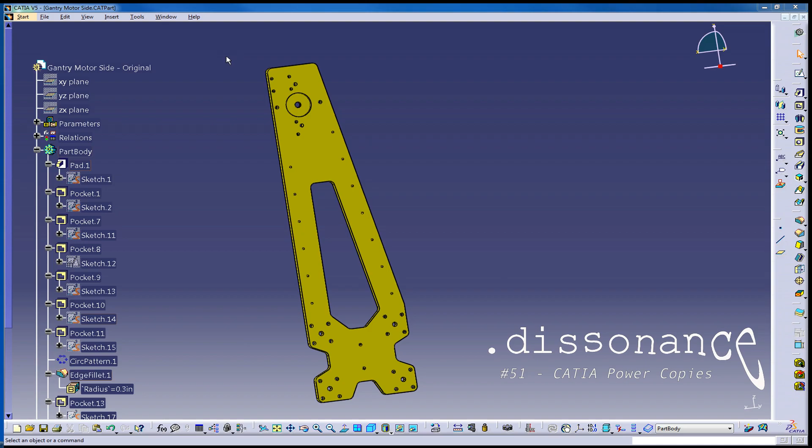Here is one of the vertical gantry supports for the CNCs that I build. What I'm after today is in this area here, this is the mounting section, the mounting holes for the NEMA 24 stepper motors that goes on the side.

So what you're looking at is there's the hole for the motor shaft, of course, and this is a recess. The NEMA 24s have a little bit that sticks out, so we recess that in. And then the 4 mount holes, which are here, here, here, and over here.

If you follow that in the tree, we have, let's see, pocket 9, pocket 8. The original pocket is pocket 7, and then down here there's a circular pattern that goes around that creates the rest of the holes. All right, so here's the problem.

This is a common feature. The NEMA 24 hole pattern is a common feature in things that I might build. If I'm going to stick a motor onto something, I'm going to need to have this same thing. I don't need all the rest of these holes. I don't need these lines. I don't need all the rest of this stuff down here, but this is common.

So it would be nice if we could save this. If I could make a stamp out of that feature and I could just stamp it into any product that I make where I need to mount a motor to, that would be great. To take it a step further, if I could take that and save it maybe in a catalog, that would be pretty cool too, but that's another topic.

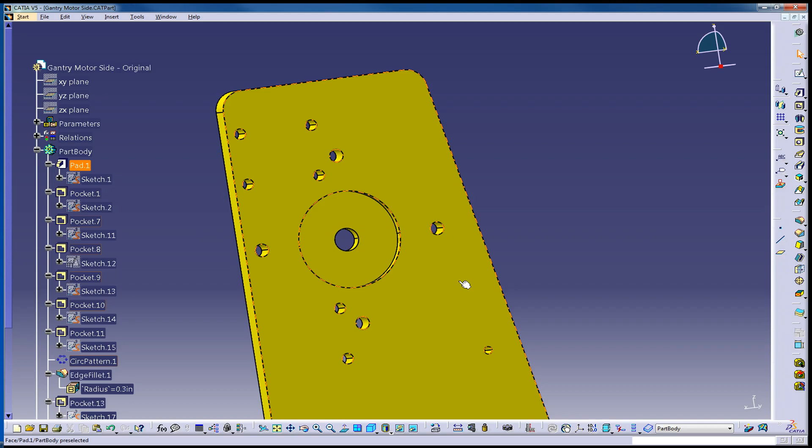So today's topic is about power copies and how we can use them to do exactly this.

So let's say we have a new piece right here that we're going to build up for some other device. Maybe this is a short, squatty little laminate cutter or something, but I'm going to need to have a NEMA 24 motor hole pattern placed right in here. So how am I going to go about doing this efficiently?

I could flip over to the other one. I could copy out piece by piece, paste it in here. I'm going to have some problems. I'm going to have to, with sketches, redefine the sketch plane that it's on. The orientation might be turned a little bit, so it's problematic.

So that's where power copies excel. So to get started first, we have to go make a power copy, and that's the critical key first thing, because some people don't understand. You got to go make it first, and then we can take it and we can apply it to all these other things.

You don't just strip it out typically, right? You don't strip it out of the part that you already have. So we're going to go off to the side and we're going to make the hole pattern again, but we're going to make it on a plain device. It's essentially going to be made on a flat pad, and it's going to have all the features we need, but not necessarily look like any kind of thing that you would see this on.

So to get started, I'm going to make the base of the power copy, but this will not be used in the placement of said power copy. In CATIA lingo, we call this instantiation.

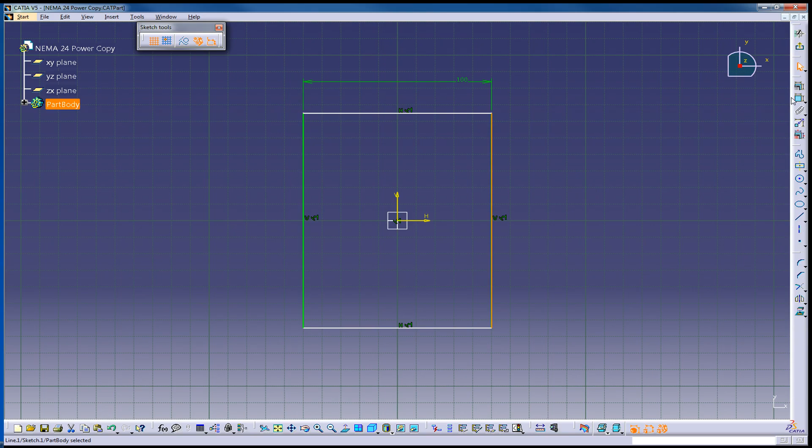So I'm just going to make a new shape here, and this is going to be, I think if we just make it 100 by 100 millimeters, that will be fine. And then this becomes, let's see what I want to do here. Let's make it 10 millimeters. This becomes the base and basis for the power copy itself.

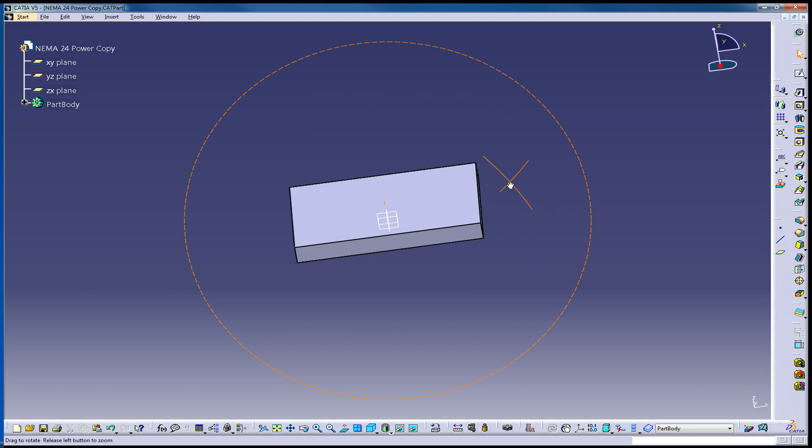So right off the bat, to put the brakes on this whole thing, I want to explain what is probably the most critical piece of this whole power copy deal. And it's a thing that I've talked about a fair amount in some of the other CATIA videos and other just CAD videos in general.

You've got to understand links. The way that one thing links to another thing, the things that you're doing inadvertently that are creating links to the part or other features that may or may not affect what you do in the future. Look back at a video on making bodies, they're talking about that. So for example, if I go here and I go to make a sketch right here, even before I get started, I just picked this face and I'm going into sketch. So now I've said that the support plane for this sketch is the top of this face, the top of this part right here. If I pick a plane, then it will be that plane, and that means something.

Of course, it's a little bit of a deal here, but you've got to keep that in mind because that might be a big deal in a minute.

So then we go into Sketcher here, and we go to make a feature. We want to make the 9mm hole going through here. So you come over like anything else, snap to origin, pull out this circle, and make it 9 millimeters.

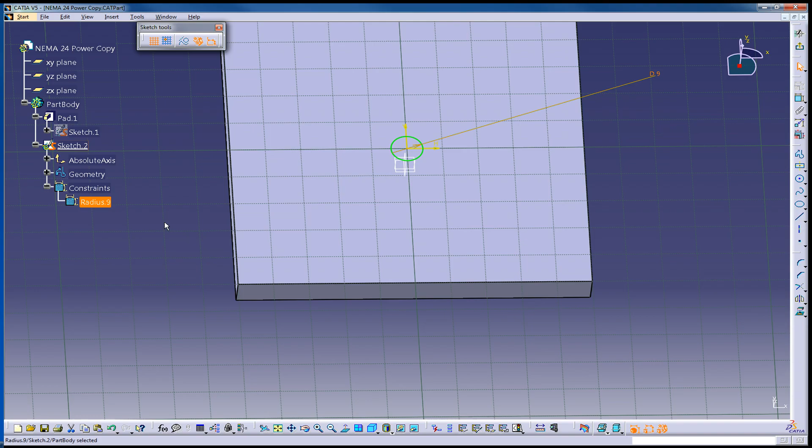The thing you've just done is, the circle part's fine, the diameter's fine, but you've made a link to origin by letting it lock there, and this is one of those hidden constraints. So we have a constraint, and I can't really even look through the tree and find it and get rid of it. That's a biggie right there.

So when you go to place the power copy, here's what's going to happen. It's going to ask you, kind of like mapping, if you've ever mapped a database to a table to a table. It's going to ask you, this sketch is on this face, what face does this mean? Then you'll say, I want it to be this face of this new part.

Then it'll say, okay, that's fine, but what is this origin? What is this center point here? What are you talking about there? And you say, oh yeah, that's this center point here.

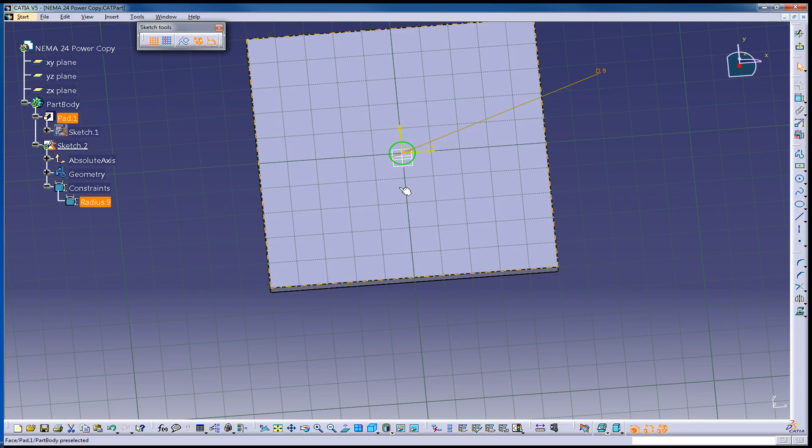Now if you don't get this, if you don't do it correctly, it might want to snap it to the origin of the new part, and that's not probably going to be what you want. So we're going to back this up, get rid of this sketch, and put our own point on this part, locked to that.

Now this is where things are going to begin to get a bit more tricky. So I have to put a point on here. I can do it either in Sketch, or I could make a reference element point. It doesn't really matter exactly, but I need to know where to put it.

So if I go into Sketcher and I put a point, I'm going to put a point here somewhere. Where do I stick this? See this right here? I don't want to stick it to that, because that means it's stuck to horizontal. I don't want to stick it to vertical. I don't want to stick it to origin.

I don't want to put it over here and then start measuring off from there, because now I just said that I'm measuring it off a horizontal. Or maybe I do. So here's what I want.

Let's look back over at the other part here. So I've got them saved over here, the new shape. And let's say I want this pattern here somewhere. So what's a good point that everything is kind of tied to, what would I key off of? One good thing might be just the top edge and the side edge.

It could be origin. It could be the bottom. So here's the bigger point to hold this thing: you need to know where your power copy is coming from, what's going to be the most logical place to place it based upon maybe how the part works, or how people think about how the part works.

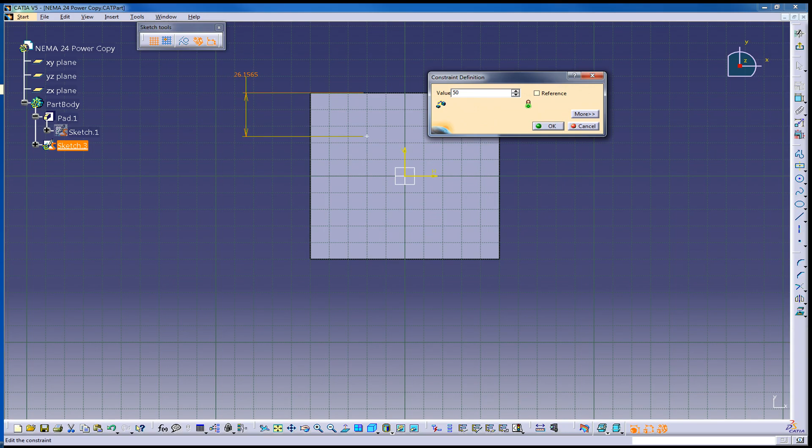Let's just say that the whole diameter of this pattern is around 30 something, so let's say this is 50 down. This will actually just place it in the center, but without locking it to origin.

All right, there's my point. So now we can exit out. We have a point on the surface there. Now we can go about making the hole.

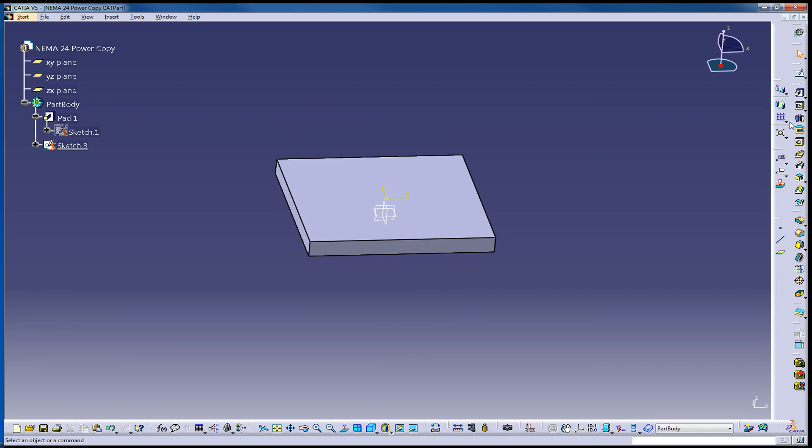You could use the hole tool if you want, but I'm just going to go through and do it as a sketch. So we'll hit the top face here, and now I'm going to draw a circle, but you do not - this is good with a lot of different things - I don't want to snap to origin.

I don't want to snap to the middle, but I can't select my point in there, so you make it off to the side. Super common thing to do. Turn it to the side, grab your center point here, and then constrain it like so.

Now if you still can't tell if you're getting that point or not, go to the sketch in the tree, find your geometry, and make sure that you're selecting the point that you created in the sketch before. So Point.3, there's that right there. And I want to make it be coincident.

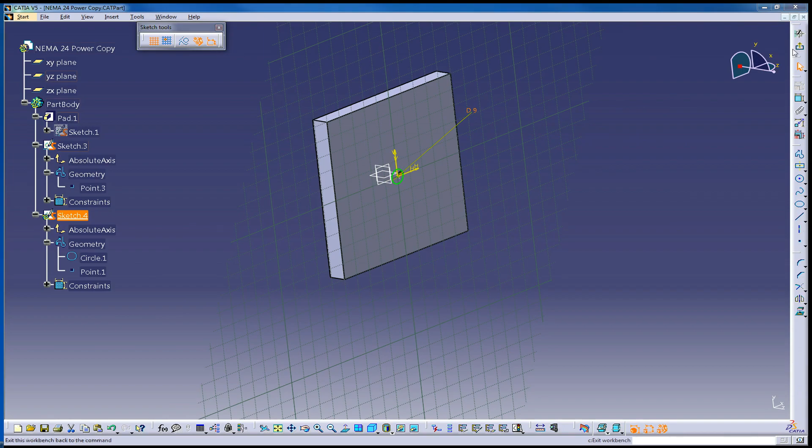So I'll exit out of here, pocket it down through, up to last. Now, right there, we made another link up to last. So this is going to go all the way through. Now this is the shaft of the motor, and yes, we need it to go all the way through.

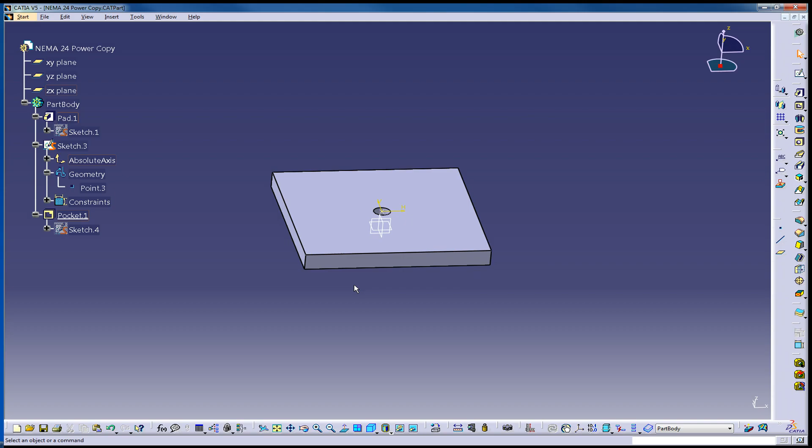What if the gantry side, what if we told it to just go down 10 millimeters, and then the thing that we're placing it on is maybe a half inch piece of aluminum stock? So you would have to change this value. It wouldn't go all the way through. So going up to last in this case is probably going to be your best bet. Keep it in mind though, because it's another link.

So we'll go ahead and we'll make the circle on the face. Come over to the side here. If we want, we can throw on a diameter right now. If we look at the data sheet, it is 38.1 millimeters.

So if we just went ahead, now you think about like how critical is this? Does it need to be really snug to it? No, it just needs to be bigger then. So I'm going to go ahead and say just 39. That should be plenty of tolerance for it to fit right.

Then we'll anchor this to that original Point.3 again, make it coincident. And then we will exit out and pocket it down. Again, the recess should be, the part that sticks out of the motor is 1.6 millimeters.

So the recess here, we won't have up to last. We'll make it be a dimension. And we'll make it, we could make it just a little bit more, but I'm just going to say 3 millimeters. We could even make it go all the way through. Maybe it's just aesthetics, I'm not really sure, but I felt like I just want to have a recess there rather than just a big old hole all the way through.

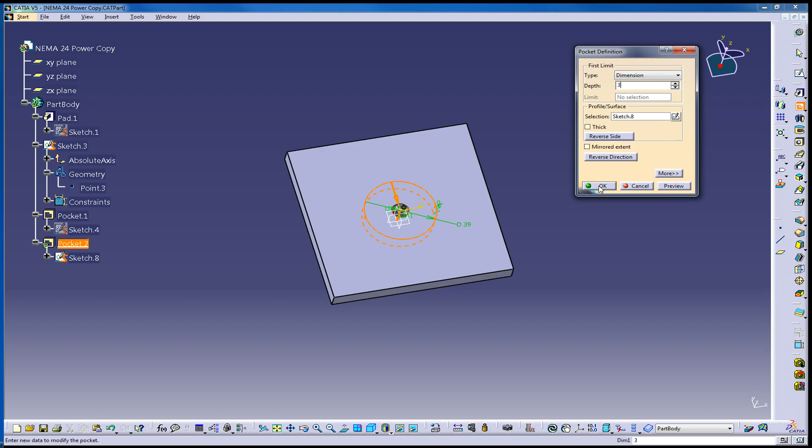So we hit OK. Oh, actually, as a matter of fact, we cannot have a hole all the way through because, let me go ahead and do this, see, on the other side of this, we place a thrust bearing up against, a collar goes on the side here that goes up against a thrust bearing, and so, yeah, we wouldn't be able to have this.

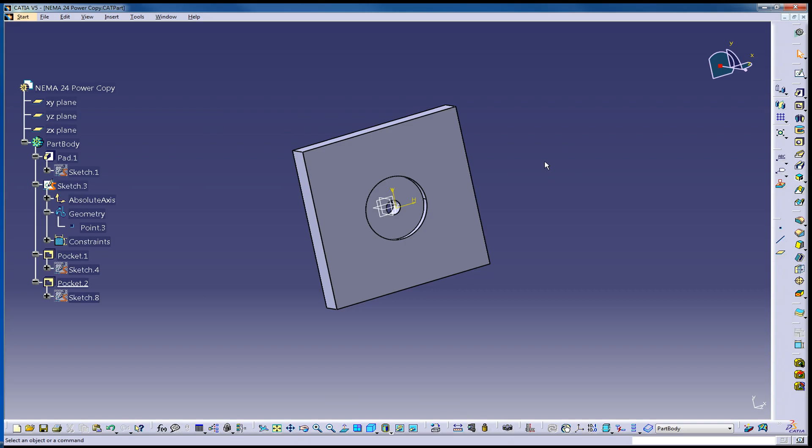What we found out is the NEMA 24 stepper motors actually internally will shift back and forth maybe, I don't know, it felt like maybe a millimeter under force. So now we put a clamping collar on the side here with a thrust bearing right smack up against the face.

So I'm going to make the first circle that we're then going to, we'll make it a hole and then we'll pattern it. Again, I'm doing it in Sketch. We could be doing it with the hole tool, but semi-irrelevant right now. So I have to put this circle down here, so I'm going to place it somewhere, but I need to know where this is going to go.

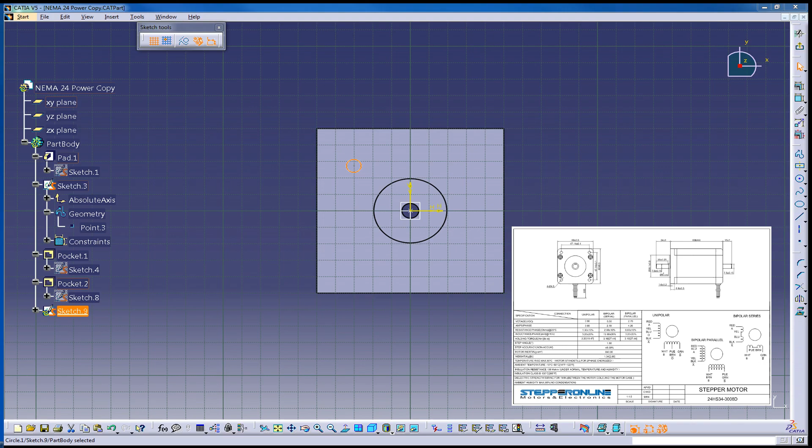And looking at the data sheet, unfortunately, they only have this listed as a dimension rather than a radial length. So we have to either do some math or we can do it a different way. Let's do some math. So this seemed like a perfect opportunity to do some review on the Pythagorean theorem in an applied fashion. So if we're looking at the sides here, the lengths that we have for the holes, we have

47.14 and we have 47.14 on both sides. So there is our two lengths of a right angle, and we need to know the hypotenuse. So in order to do that, we're going to come over here. We're going to say 47.14 times 47.14 equals

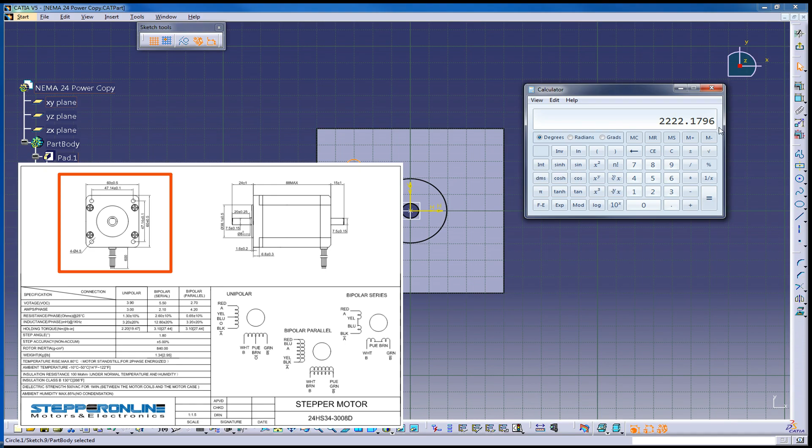2222 point whatever. So then we need to plus this time, that again, but I'll just say times 2 because that's okay. So now we get 4444.3592, and then if you look at the theorem, which I'll probably post up here somewhere, all we have to do is square root that out, and we get 66.66666. So this is our two-thirds repeating, whatever you want to look at it that way. So the length from corner to corner is going to be 66.666.

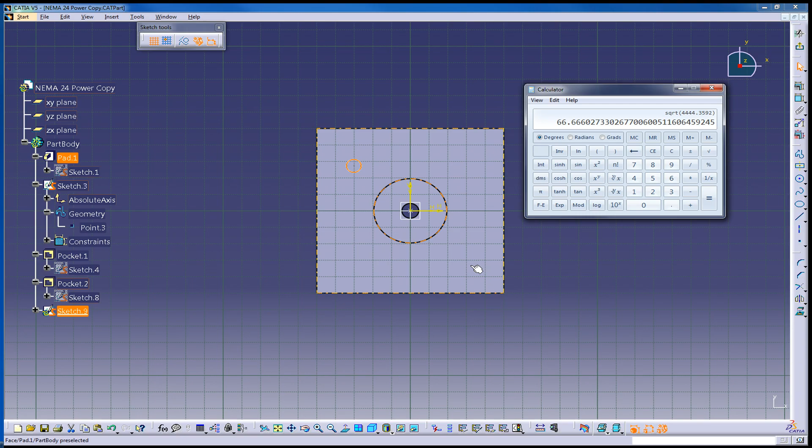So if we want to do a radial, then we'll have no problem going from here. Whoops, let's click on the background first. Go from here to center, and we'll make it 33.333. Cool. But we want to make sure we pick that point.

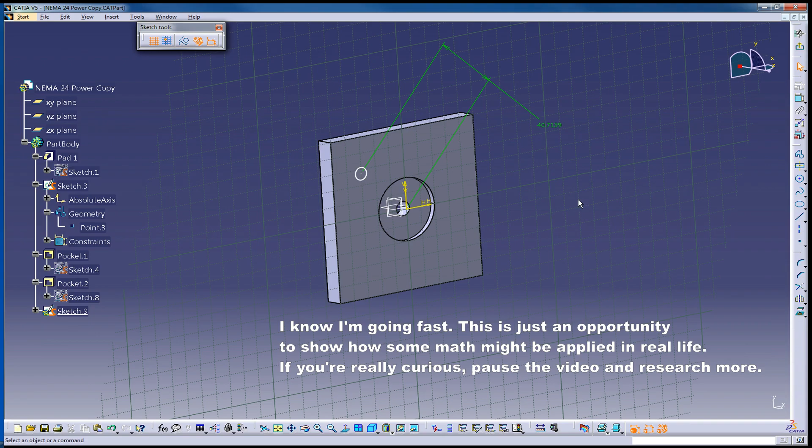Do you need it out that many decimals? Probably not really.

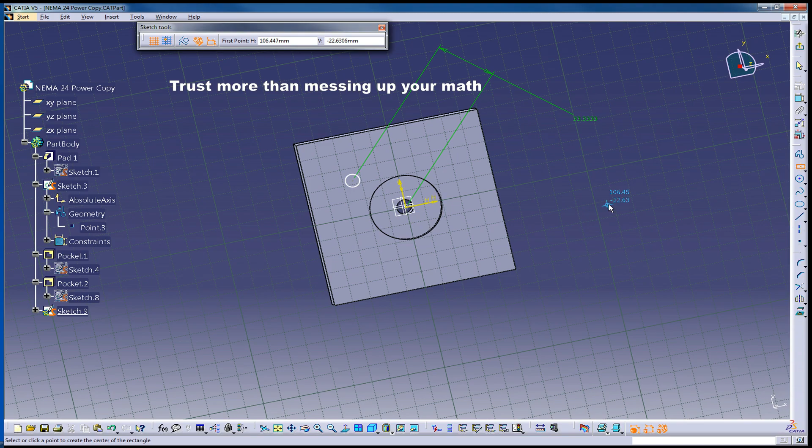Another way you could do this, which is probably a little bit easier, and maybe you can trust it a little bit better. If I take a centered rectangle, it doesn't matter that I'm picking center here. I bring this out and make a dimension, and of course this is going to be 47.14, then we'll do the same on the other side.

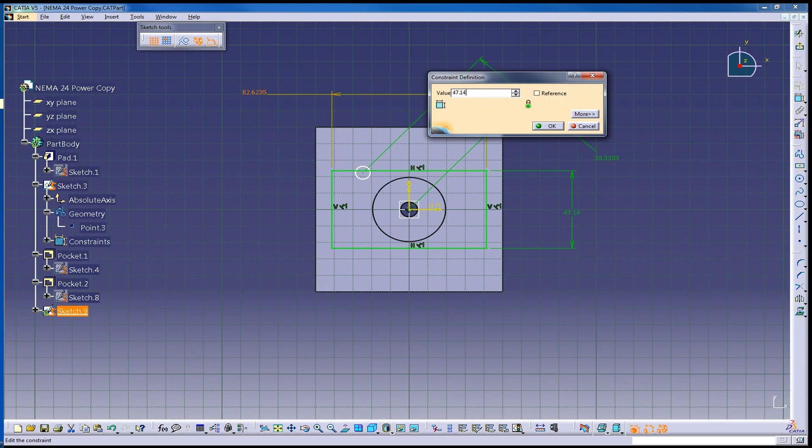And what we should find out is that if we move this around here, it matches perfectly. We'll leave this here. I'll make this a construction element, and we'll see how far this is off so we can check our math.

As far as perfection goes, this is a repeating decimal, so CATIA has some sort of fudge factor in it. I forget what it is, but anything past some decimal figure, it calls exact. It calls it even, I guess, so we'll find out what that is. Anyways, we're going to make these a construction element, and then we have to put this at an angle.

This brings us to our next issue: what is this all going to be based off of? To get this started, I'm going to make a line first from here to my point that I made back here in sketch 3.

You got to be careful here. You probably won't, like if I go to try to snap from here to here right now, guaranteed that's origin. So what you're going to want to do is turn this to the side here. I'm going to grab sketch 3 and make a projection of it first, project this forward as a construction element. So down in there somewhere is the little point, but I can snap to it, though I might still be snapping to origin. So I want to make certain that I'm not getting a hold of that.

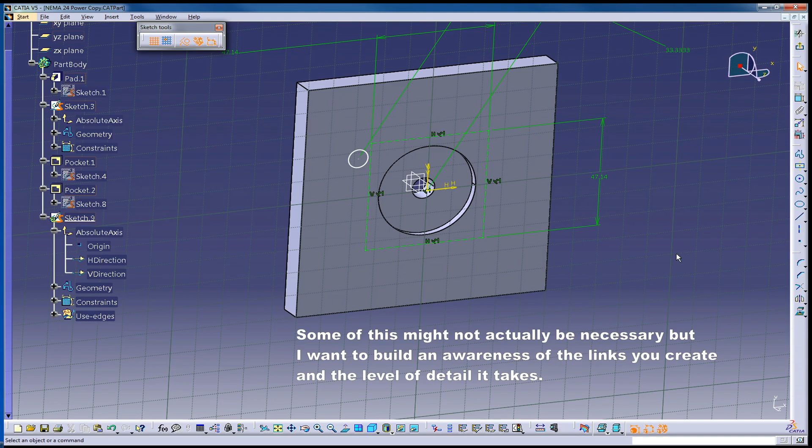So what you want to do is hide all of your lines here. I'm going to hide the absolute axes back in sketch 3 just to get that out of the way. So there's that gone. Now if you go to sketch 9 here where the circle is, if I hide the absolute axes, I'm not sure why this is, but if I hide it, it's still there. So you have to pick each one of these and hide those. Now those are gone, and now I can see my projection kind of inside there.

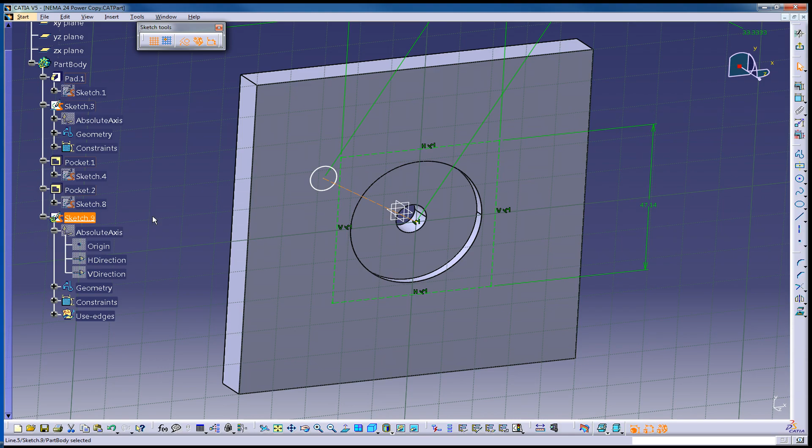So now we grab a line, construction element, grab the center point here, and then snap to that there. So that gets us that. Problem one solved. Flatten this back out.

Now I need to get a line going here that I can create an angle off of, but it cannot be based on anything horizontal or vertical. It's got to be its own freestanding line. So we're going to have to get out of sketch here and take a look at this.

So here is our part, and there is our point back here in sketch 3. Now we've determined that we need a line to build an angle off of. So we have to take a look at our main part, or the parts in the future that we don't know of yet but think we're going to be making, and figure out what's going to be a thing that we could take a direction off of. Could we take it off of one of our planes? Our planes will always exist, so maybe that's an okay thing.

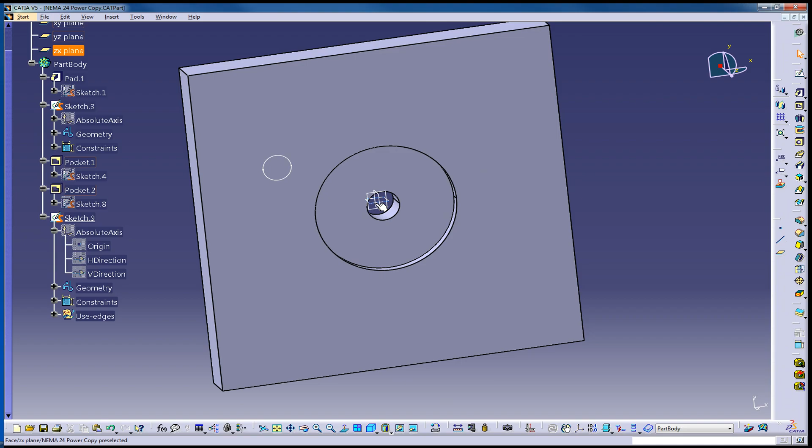Let me give you an example here. I understand this is probably a little bit weird since we haven't actually made a power copy yet. Once we do this, you'll see why I'm going through all this effort, and then I'll review everything again. So I'm going to make a line here, and I can pick this point as my starting point, and then I need a direction—let's go point and direction. Like I said, this is where I got to figure out what this is going to be. We just need something to base this angle off of.

So for example, if you need an angle off of the floor, then maybe the floor is the thing you're going off of. If it's something people typically measure off of a wall, then maybe the wall is going to be our direction. Maybe I'll choose this side edge right here, maybe I'll choose this line, maybe down here, or maybe I'll choose the plane.

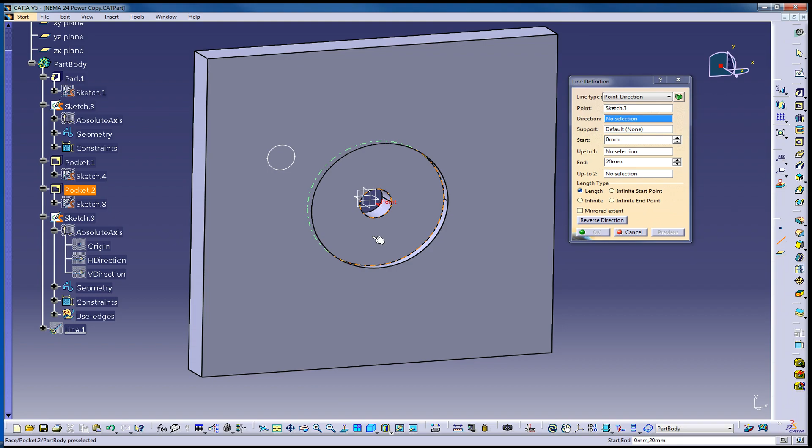So think about this. Watch the video, get done, see where we're going, and then come back and watch this again possibly, so you'll know what my dilemma is better at this point.

So I'm going to pick this. Actually, I'd have to pick this line because I can't pick that face there. So I'll pick this line, and now the direction of this line that I'm going off of is based upon the direction of the side edge of the gantry plate.

And if you want to do both sides, if you want to make it infinite, that's fine. I'm just going to go ahead and make this. That's good enough, I'll just leave it like that.

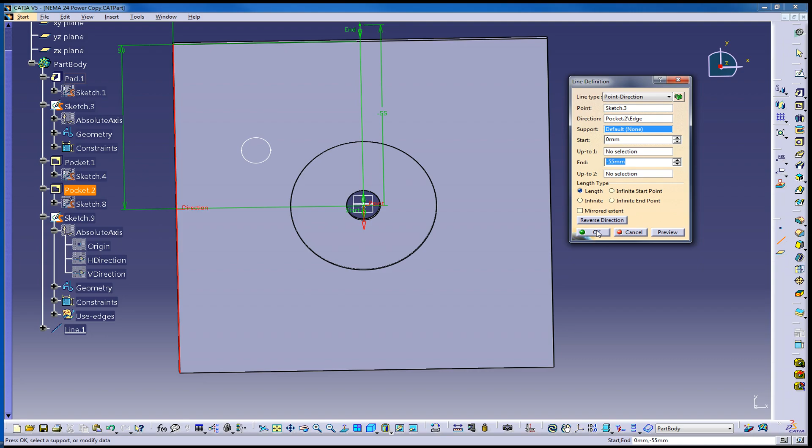All right, so now we have a point and a line, but another small problem. As you go through this, and you're starting to make more and more features that are reference geometry, somewhere along the line you might decide this should all be in a geometrical set. Watch my videos on that.

So you might decide you want to insert the geometrical set. We can call it whatever you want, you can leave it blank, call it reference elements or what have you. I'll just leave it blank. I'll insert that here, and then you start deciding you want to move all your reference elements in there.

If I would have known where I was going in the very beginning of this, then of course you would have inserted a geometrical set first and then started building all your reference elements in there. But very frequently you don't know, and so you just start going to town.

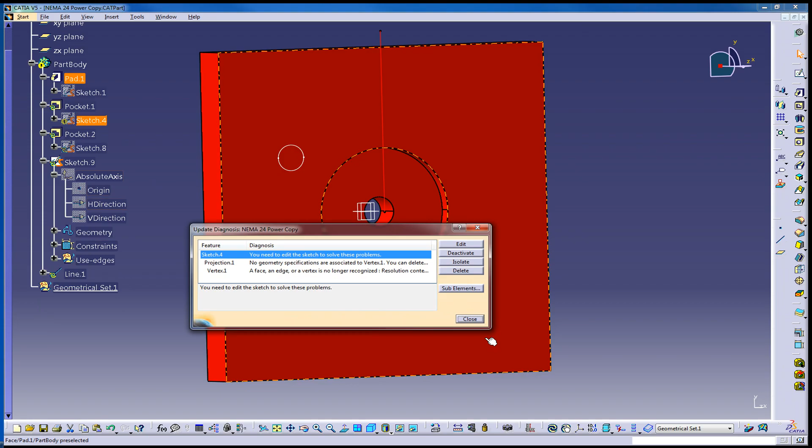Now what you can do, though, it's pretty easy enough. If I just cut and paste this, as soon as you cut it out, we're going to get mega errors. So Control Z. What you can do is you can reorder, and a lot of people maybe don't use this.

You reorder it, but what you can do is say, I don't want it after or before, I want it inside. A lot of people don't know what inside, before and after means, but inside means inside another feature like a geometrical set. If you do this, it will move it basically in one step, which doesn't give CATIA any time to figure out there's been an error. So that's great, that's moved into the geometrical set now.

Now I can take my line right here, line 1, and I'll do the same thing. I'll reorder that inside geometrical set 1.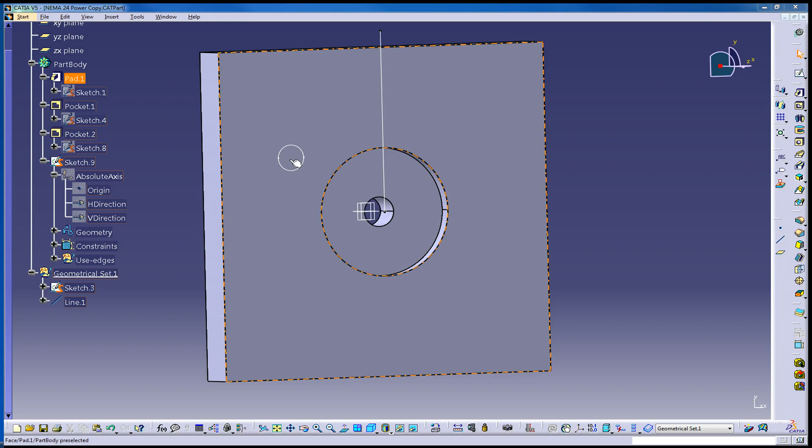Incidentally, that line, I would have had to move into a geometrical set because of the time awareness of a regular body versus the non-time awareness of a geometrical set. The line was created after my sketch here, so if I would have went in to edit the sketch, it wouldn't have even seen the line. But now it's all good.

One last thing that I like to do, whenever I make a feature like this, I will go ahead and change it to like an axis line type, and possibly even give it a color so it stands out nice and bold, and you know what's going on.

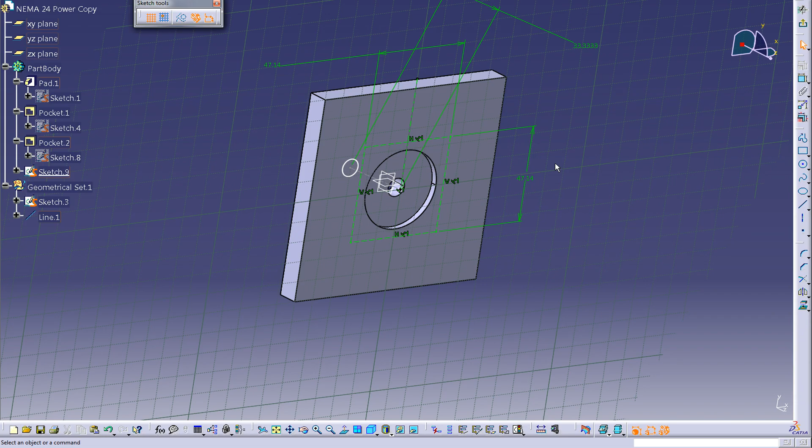So then getting back into the sketch, now we can see, we turn it here, you can see it a little bit better, but there's our line that we just created, and we can use that to base our angle off of. So we'll flatten this back out, grab our constraints, pick this, make sure you don't get anything else. If you want to, pick it way up there, and we can go ahead and make this 45 degrees. Bang.

And then as you notice, our math was good. We're right smack on the corner of that square.

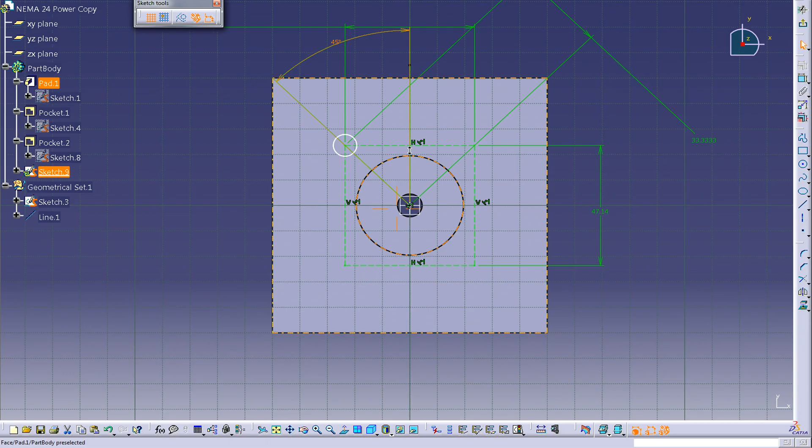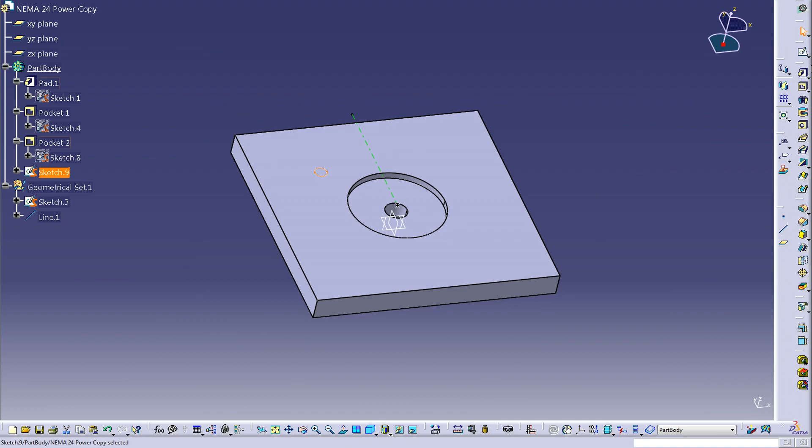Last thing really quick, might as well put a dimension on our diameter there. The data sheet says it's 4.5 millimeters. This is going to be a through hole, we're not tapping it or anything, we're just going to put a nut on the back. So we'll go ahead and change this to 5 millimeters, call it good. Exit out, and then we can pocket this through up to last.

All right, so what we're going to do is we're going to take Pocket 3 and pattern it, do a circular pattern around here. So here is our reference direction, and the thing to think about in this case, like in all the others, is what are we linking to?

What are we choosing as a reference direction? For example, if you use your z-axis or your vertical, one of the axes in your sketch, it's going to again create a link that we don't want to have. So what we're going to do is pick some feature like this wall or this one here that we can spin it around, relative to the power copy that we're creating.

All right, so which one do we pick? Next problem, it's kind of a small one. Which one of these features is more likely to stay around rather than the other?

The thing that I haven't mentioned is when we go to place this, it's going to explode all these features out just as they would be in the tree here, as opposed to, say, having one item in the tree called power copy. So you will see these in the tree, placed all in, and then it gives you this extra added bonus of having something like, say, a power copy that's got 10 or 20 elements to it.

You could place this power copy into the tree knowing that you're going to get rid of a few of them, because it's still easier to do that than it is to create the 10 or 20 or whatever bunch of elements to begin with from scratch.

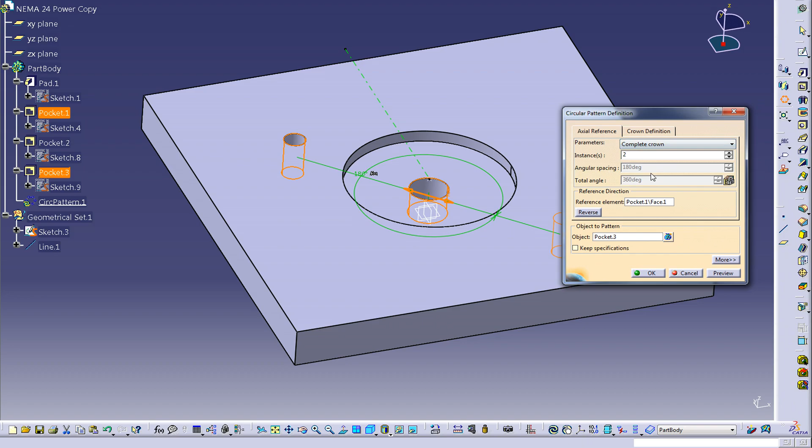All right, then we come up to here and we're going to change this to a complete crown with 4 of them. Hit OK. There's our pattern, there's our part.

So now we're done with our power copy. We'll go ahead and save this. The thing you don't have to do is save this as a power copy. A power copy is just a regular CATIA cat part, it's not like it's cat power or something.

So that part's done. The next thing we have to do is find our power copy toolbars, and I can tell you they're going to be down here in the bottom. So come down here to the bottom, you see you've got a double-headed arrow, so that means there's more stuff there, and start pulling toolbars out.

So you start pulling them out, and here we go. So what you're looking for is this toolbar here, and under this we have create a power copy, and we have a handful of different items here. Save in catalog, and over here is instantiate the power copy. So you can instantiate from document or from selection.

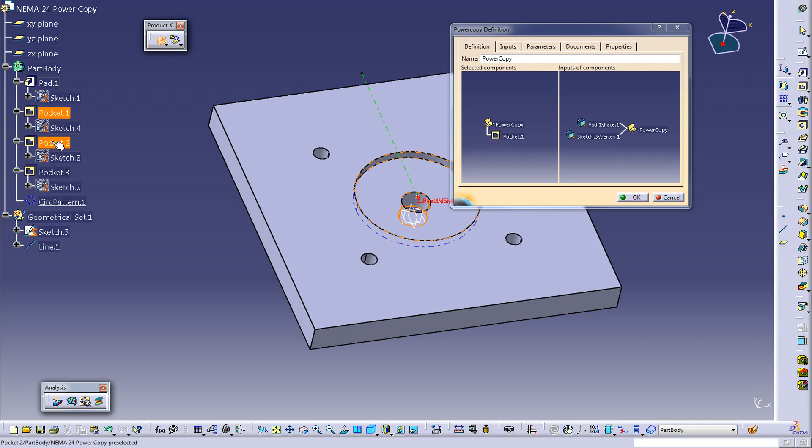All right, so we're going to come up here to create a power copy. Come over here, we'll add in all of our elements. So if I click Pocket 1 again, there are our inputs right here. And Pocket 2, I click that.

Pocket 2 gets added, but there's no new inputs. Pocket 2 has all the same inputs, or well, at least there doesn't need to be any more than what we had for Pocket 1. Now Pocket 3 has the addition of Sketch 3 and Line 1.

Remember Line 1, we used that, that's this one right here, the green one, so that we could make our 45-degree angle. And then lastly, our circular pattern. Circular pattern doesn't bring in anything else.

All right, so we're basically done, but I want to explain here that over in our new part, whatever new part that we're going to be placing this thing in, all of these inputs here are going to need to exist. That is the key point to all of this, the part that I think a lot of people miss. You can't just take your power copy and stick it in somewhere where you don't have these inputs. It's going to try to make a connection, and if you can't, it won't work.

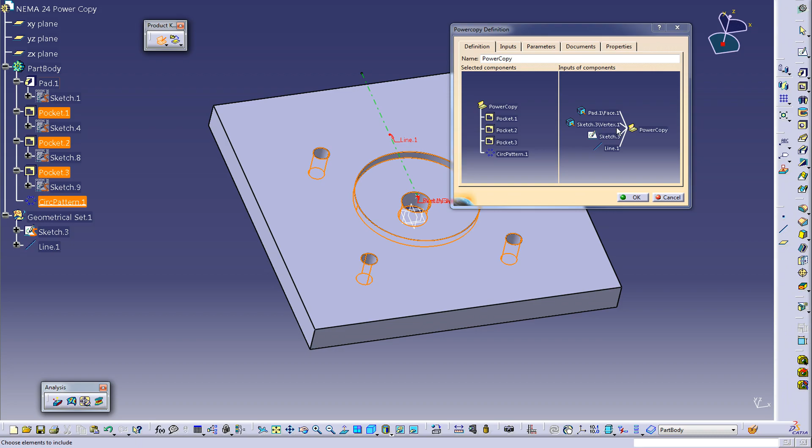Okay, so we'll go ahead and make it, but we'll come back to this in a second. So I hit OK, and then over here in the tree, again, as I said, it doesn't make a new part or anything. It just adds in a new section here, a folder, if you will, with our power copy underneath.

All right, now as you see power copy 1 here, this is in a folder, right? The reason for this is you could add more if you wanted to. You could have one big block with all the different power copies on it that you've made for common features that you use.

So we're getting close, that's essentially all of the preliminary information complete. At this point in time, you would typically save it, close it, and store it somewhere you can come back to whenever you need.

Now these two buttons here are the different ways we would instantiate them. If we instantiate from document, that just means you're going to open a browser window, find the part in your tree structure somewhere on your computer, and then place it, instantiate it.

The other one is instantiate from selection, meaning you already have this open in CATIA and you come back and pick it. For whatever reason, if this is open and saved, it won't let you place it using instantiate from document. So that's the difference there.

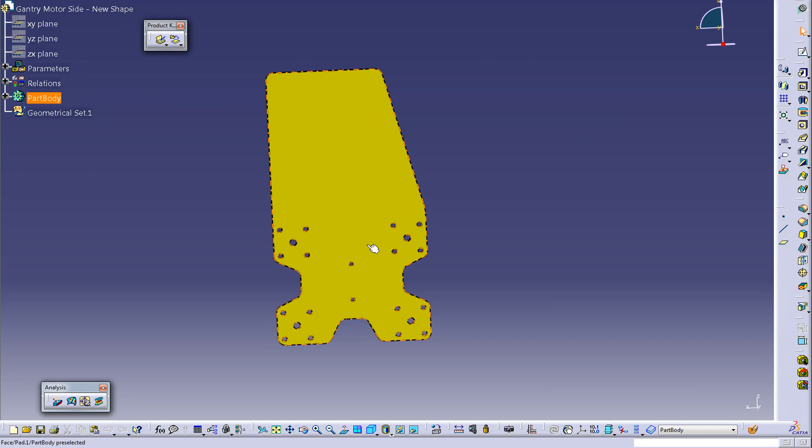I'm going to instantiate from selection because I want to leave this open so I can come back to it. So I come over here and pick this shape right here. This is my new part, the new gantry side piece, the low squatty version of it. And we want to place our motor mount somewhere in here.

So we bring up our power copy again, and we say okay, I want to instantiate from selection. Then it turns orange, and this is one of those common CATIA buttons where it doesn't really pop up a window for you. It just sits here being orange, and you're supposed to know what to do.

If you look down here at the bottom where my mouse is wiggling in the status bar, it'll say select the reference to instantiate. Now people that are new to CATIA don't understand that you can do this. They're looking around, wondering where do I go?

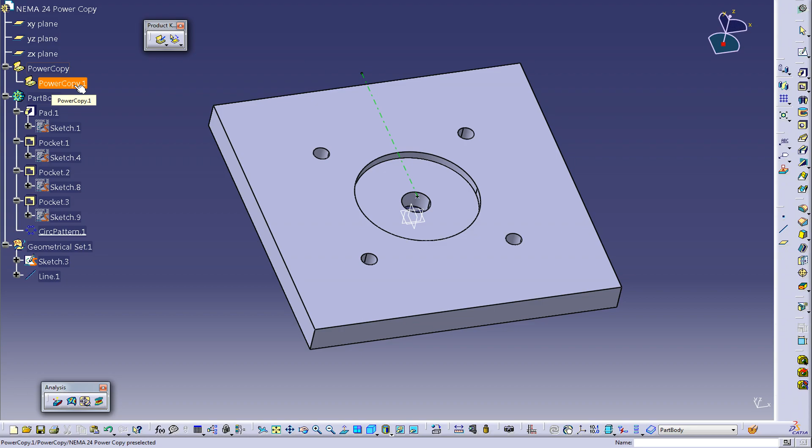Well, what you do is switch windows, and now I can go to my NEMA 24 power copy. You'd think you left the thing, so it would forget what it was doing. But if you come over here and pick power copy, not this, but this, then it goes, oh, that, okay, we'll bring that in.

Now this is the somewhat tricky part, the part that can cause people a lot of grief. Here are your inputs, these are all those things we saw: face 1, vertex, sketch, line. So what it wants is for us to click what is considered the replacement for face 1.

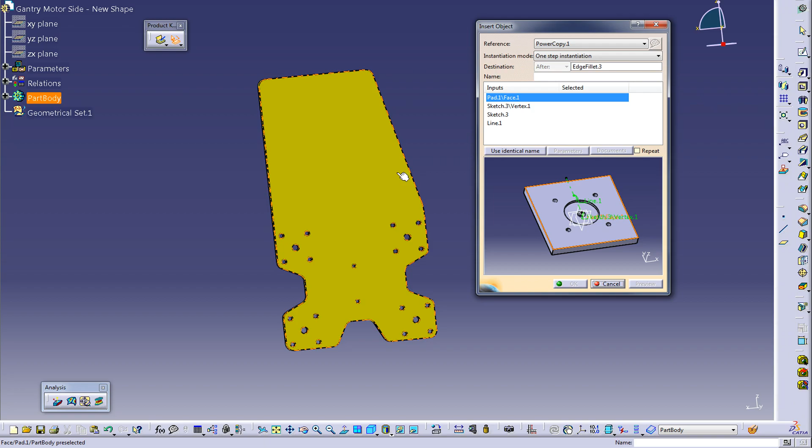Could this line be the replacement for face 1? Well, it won't even let me pick it, it needs to be a face. So you figure out what face this is going to be on. This face, click it. Great, we have it.

Now which one is going to be the replacement for vertex 1, the thing we based the initial hole off of, the positioning of it? Well, that's going to be right about here somewhere. But you see, there's a problem.

We don't have it. This is the deal: there is no vertex, we don't have any sketch 3, we don't have any line. We've got none of this. So we have to create it first. That's the problem.

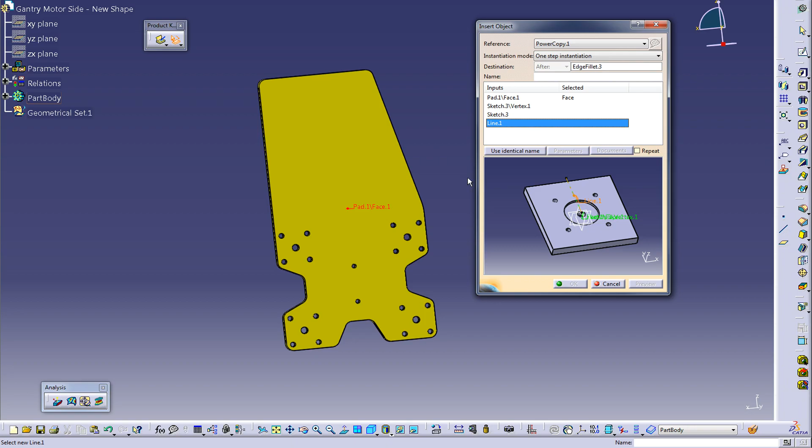Let's go ahead and open up the part body here so we can see what's happening. Now, I guess we should start with the point first. We need a point, and then we need to have a line coming off of that. That should really do it.

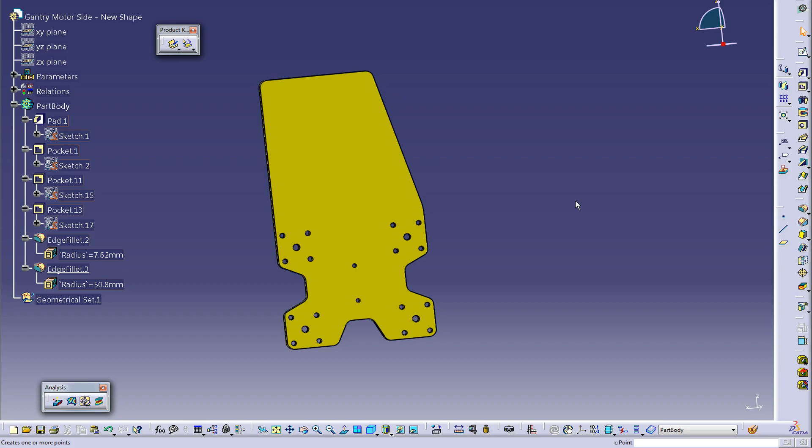As long as we make the point, it's got to be the sketch, right? Looking back, I should have made the initial point not a sketch, I should have just made it a reference point, incidentally. All right, so I'll pick sketch and go into the top face. So that just defined a face, by the way, and that's okay, that's the one I wanted.

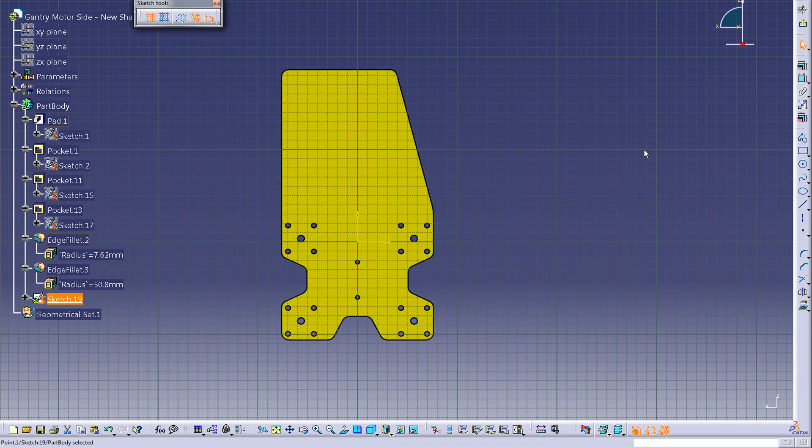Then I'm going to place a point here. You place the point wherever you want. Remember, we measured it off the top and side edge. I'm going to go ahead and leave it right here, about in the center. Exit, done. So there's our point.

And then we're going to add a reference line. So we'll hit this, we'll pick our point and direction. The direction is going to be, again, we chose the side edge as a line, thinking that's the way we'd want it. We'll go ahead and do that, then we hit OK.

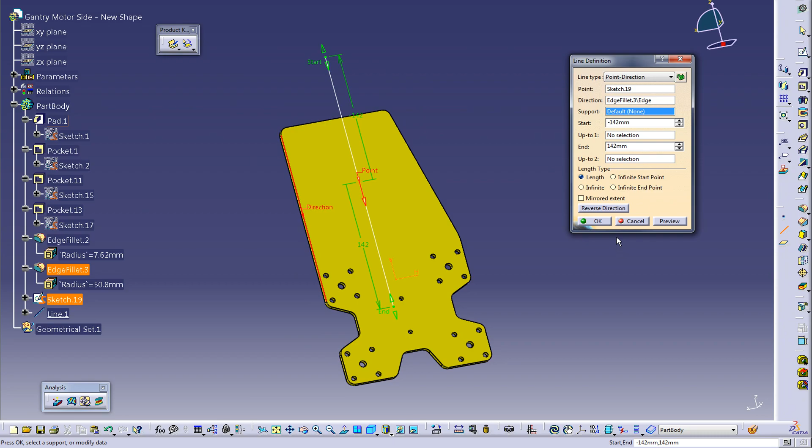So there's our point, there's our line, we have our face and the sketch. We should have enough now to place or instantiate the power copy.

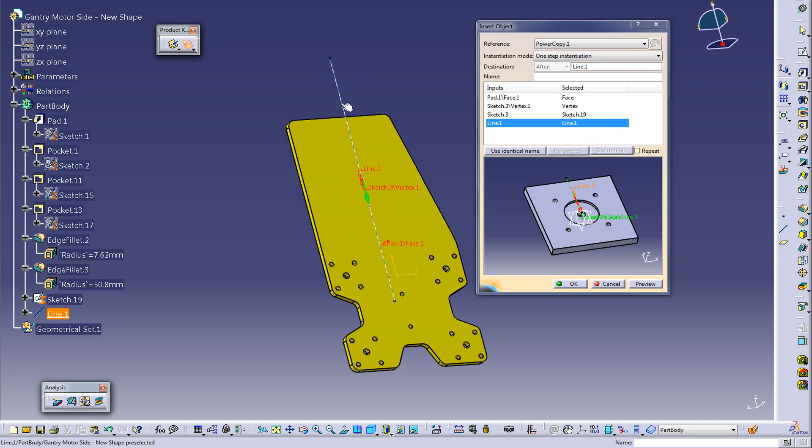So we go ahead and pick instantiate from selection, flip windows, come over here, grab power copy 1, and now we can pick our face, pick the vertices right there, pick our sketch, which is over here if we want to do it that way, and then the line is right here. No problem, looks good. Hit OK. And there's our power copy.

In a nutshell, that's done. That's our purpose, that's what we wanted to do.

Imagine that you had a feature like this that had a lot more features, some kind of element that you place on all your parts, with 10, 20, 30 different elements to it, and you find yourself having to recreate that over and over again. Sounds like you need a power copy. So you make one of these, store it somewhere in your file system, tell everybody you work with where it is, and anytime you need it, you just instantiate it. Pretty cool.

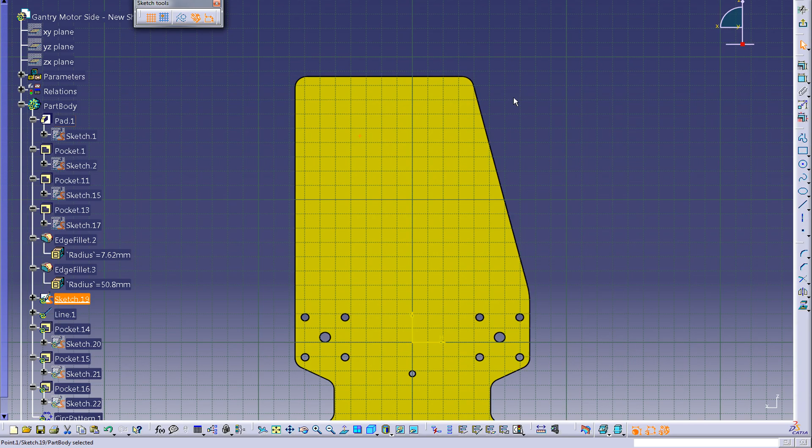That's the idea, but I want to do one more thing here. I want to show you how to modify this and move it around. The way it stands right now, I could go ahead and pick that point, go to point sketch 19, grab that, and just move my point down here. Look at that. Everything moved, because all the links, all inputs, everything we constrained, it's all tied together relative to itself here. That's such a big thing to remember. Do it again. Grab it, move it up here, move it over here. Maybe you want it just there. There you go.

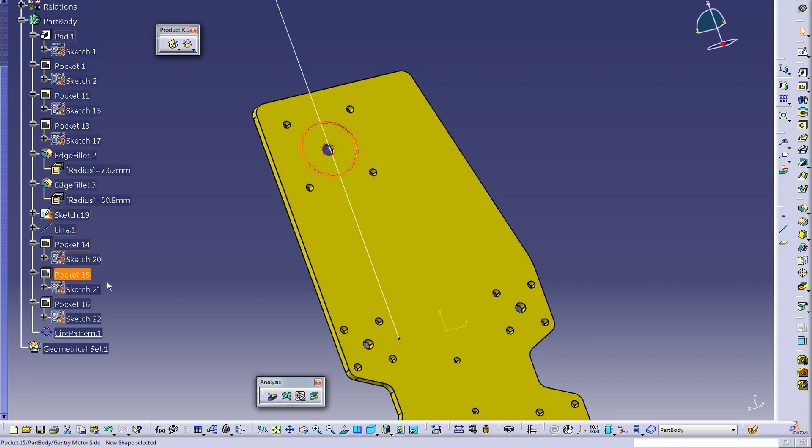Now, if you look over here in the tree, you'll see what I was talking about earlier. Our power copy is still just a bunch of regular CATIA elements here. So if you want to edit any one of these, if I want to find this recess here, for example, double click it and edit it, there's nothing special about it. It's not tied, linked, or anything to anything else, it's just a plain old pocket. So if I want to change this to 5, no big deal. You can have your power copy with a bunch of elements in it, and you could delete certain ones if you didn't need them, and it'd still maybe be helpful to make a power copy. Or, knowing you can edit them, you could have a power copy based upon all these different types of features you could be using, but then after you instantiate it, you just come back through the tree and modify them. Pretty cool.

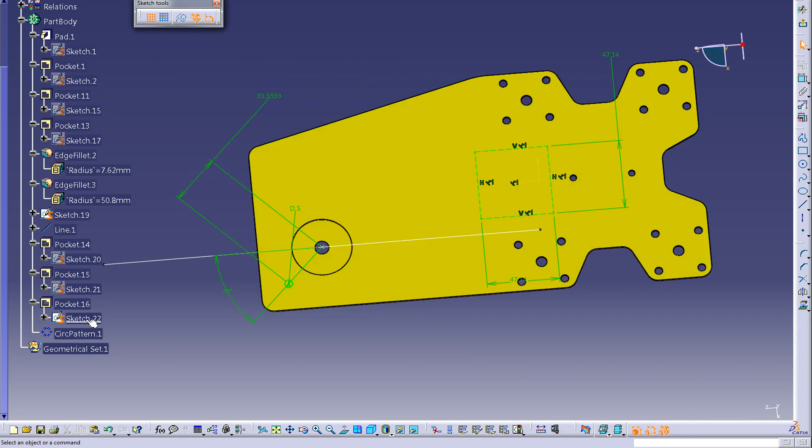Let me show you one more thing. What if I decided the placement of this thing was great, I can move the point around and that's all good, but what if I want to rotate it? What if I want to rotate the thing? Well, I could just come in here to this pocket where I went, and here's this angle, I could change that. This would for sure be one way to do it. I just twist that. Now it's tilted.

But I'll undo that. What I want to show you is, what if this line that we use for straight up and down, what if I have that already at the angle that I want, or the angle I want this to be 45 degrees away from? Okay, so let's do that. I've rewound this back to before I placed the power copy, I just have the line and the point. I'm going to do a couple things here to make this a little bit smarter. I'm going to take sketch 19 and line 1, and reorder them into this geometrical set right here, get them all contained here. Sometimes I like to put them in a geometrical set for no other reason than I get to hide them, so I can hide them way easy. So I have those, I'm in the geometrical set. Now I'm going to make another line.

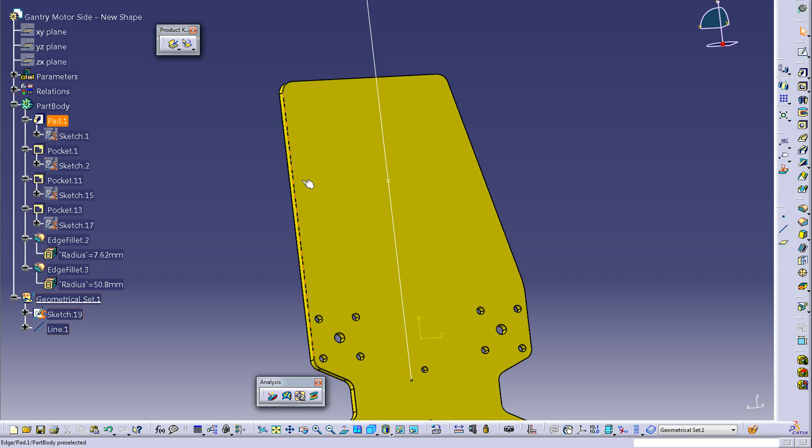This line is going to be a point, or an angle normal to curve. So I'll pick the curve first, then pick my point right there, and then I need a support or a face that it's on, and in this case the top of this is going to be just fine. So then we get our line here, and if we want, we can change the angle. For now I'll leave this as 45, but we're going to do something different to this in a second. I hit OK, then we're done with that.

I'm going to come up here and define part, body in work object, otherwise we'll have some problems. Make sure you click on the background, or otherwise it's going to try to instantiate from something else. Then pick instantiate from selection again, bounce over to your other window, pick your power copy.

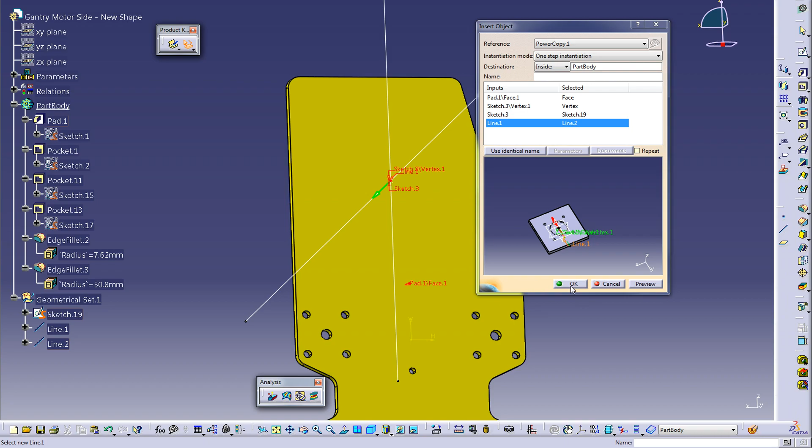Now, same thing again. We pick the face, we pick the vertex right there, and the sketch is sketch 19. Then our line now is going to be this one right here. So you pick the line that has the new angle, and there you go. So now our part is 45 degrees away from this line instead.

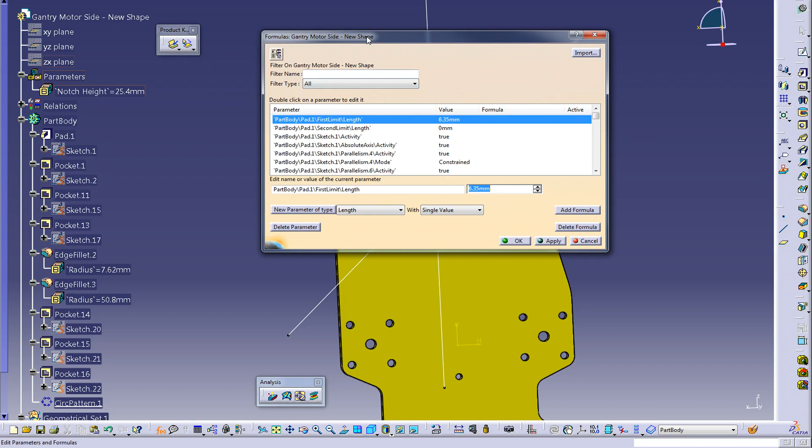That's pretty cool. One last thing, and this is kind of a prelim to another video I plan on doing soon. If you look over here in the tree, we already have an item called parameters, and that's because there's a parameter added, but also there's an options button you have to check for it to even show up. So if I come down here, I can hit this. This is all the parameters, all the things happening in this part already.

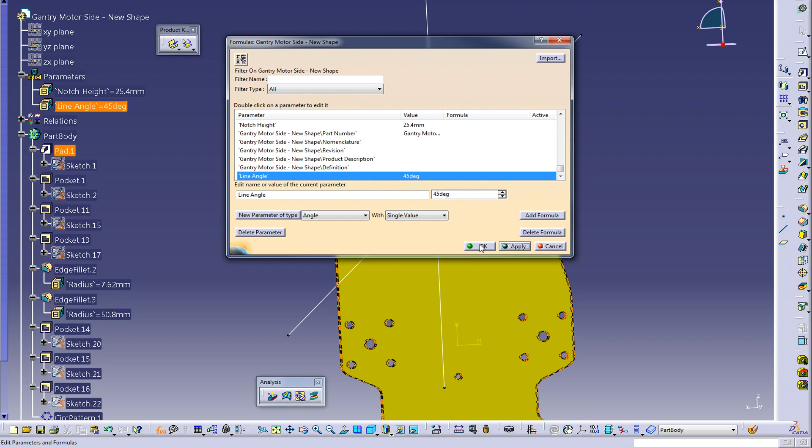I'm going to say a new parameter type, and this particular one is going to be an angle. I'll hit that and give it a name — this one will just be called line angle. For starters I'll make it 45 degrees, what it already is. You don't have to do that. Then I hit OK, and now in the tree I have a thing called line angle. This isn't doing anything whatsoever. If I double click it and make it 30, nothing changes. If I hit it again and make it 20, or let's just put it back to 45, nothing changes because I haven't linked this to anything yet.

So what I've got to do is come down here and find line 2, and this is really cool. I love parameters — you should really use these. SolidWorks, Fusion 360, they all have things like this that you can use.

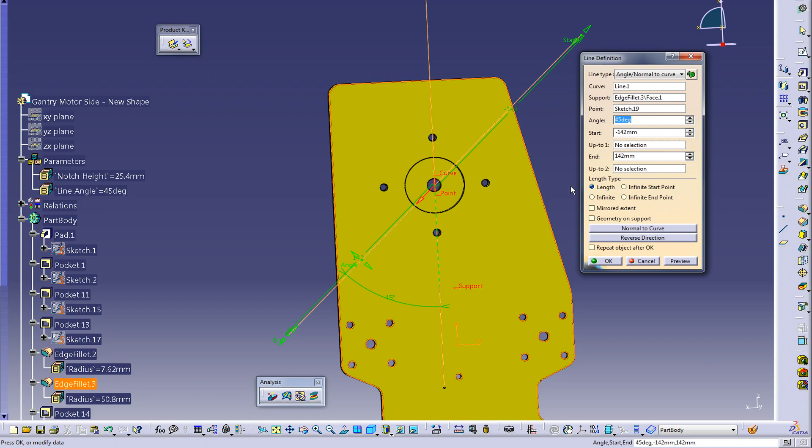So what I do is come over here to the angle that says 45 degrees, and all you have to do is this: I hit equals, the equal sign, and then enter, and it asks what is it equal to — select the parameter to associate to. So I pick this one right here, and now you can see it's controlled by a formula, or in this case a parameter. Hit OK. Great, now they're linked.

Now watch the power copy. I double click here and make this 30, and now it changes. Now I hit it, make it 20, it changes. This is a really cool way to add in any kind of quick change functionality to your part. It allows you to manipulate it a little bit so you can see what it'd look like without having to pop into a sketch, pop in and out, and try to recognize whether or not anything really changed.

So anyways, that is it for power copies. I hope you learned something from that, and I hope you try these things. I think power copies and a few things like it — formulas, parameters — are kind of daunting for people, and they try to avoid them.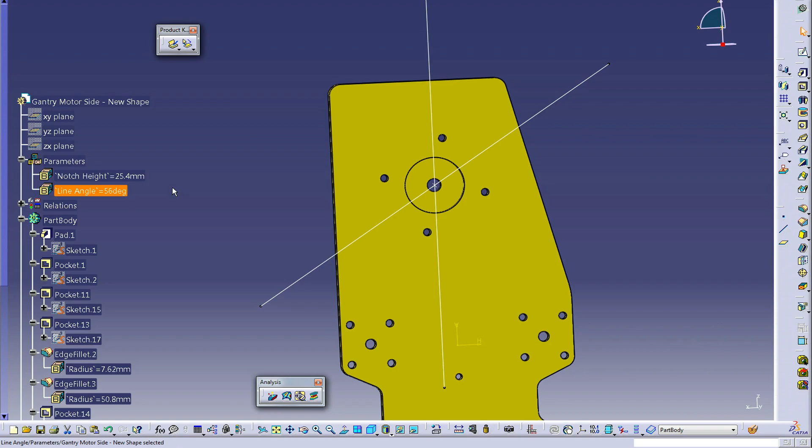So try this. Try getting used to it. Find some feature of a product that you use at your company or wherever that you could maybe take out and make into a power copy. Start somewhere simple, save it, and see if you can begin to instantiate in different places. I think you'll find that once you get used to it, you'll save yourself a hell of a lot of time. So anyways, thanks everybody for watching. That is it, I'll see you next video.